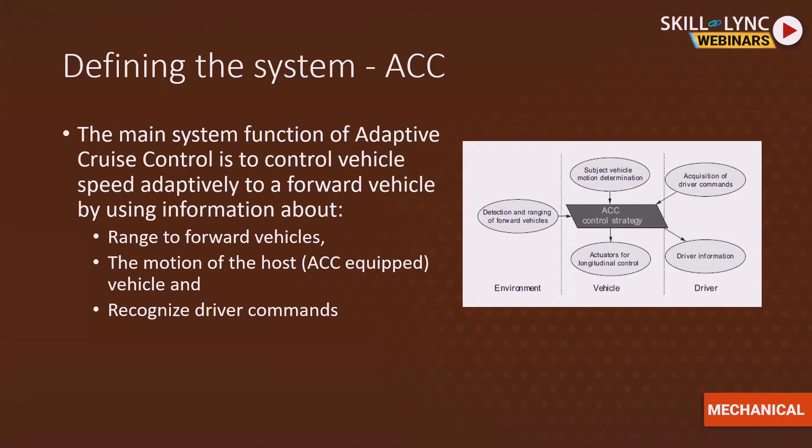So what are the conditions for ACC? Like when you look at an ACC system, what are the conditions of the system? So essentially what we're looking at is individual stability. That is our primary goal when you talk about ACC. How do you quantify individual stability? That's when the spacing error of the ACC vehicle converges to 0, when the target vehicle is moving with a constant velocity. This is essentially an ideal condition. That's how we always start, right? In engineering, you set an ideal condition and you try to achieve it.

Mathematically, how do I represent it? So mathematically, as you can see the equation on the right hand side, delta i is your spacing error. So what you want is x(i-1) plus the change in this should be equal to 0. And when can you say that individual stability has been achieved? That's when your acceleration is 0 and your spacing error is 0. Because if you're not accelerating, then you're maintaining a constant spacing, right?

So that is your primary desire when it comes to designing an ACC controller. If we move up slightly, then you talk about string stability. So string stability of a string of ACC vehicles, we are essentially moving into CACC territory here. But what we were trying to do it only with the radar, right? So essentially what happens is in an equation here, we have xi and xi minus 1. It essentially keeps increasing to xi minus 1. Then you have an xi plus 1, xi plus 2, and so on and so forth.

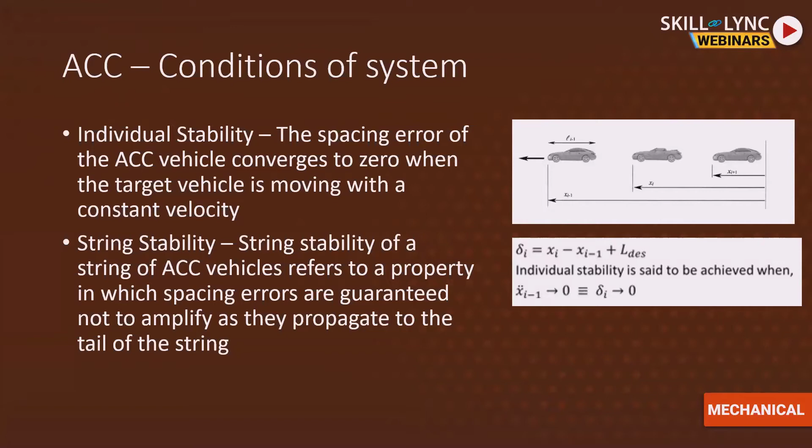Here, it's basically just like a state flow diagram for an ACC control architecture. What is the overall system, right? So here you can see first is the commander, which is the desired headway algorithm. Here, all your inputs are going in, right? Everything that we spoke about earlier. So the range, the R dot, which is basically the rate of change, then the velocity that the driver has set, the desired headway time, which is essentially the distance or the time you set with the lead vehicle, and the velocity of the vehicle that we are in. All of this

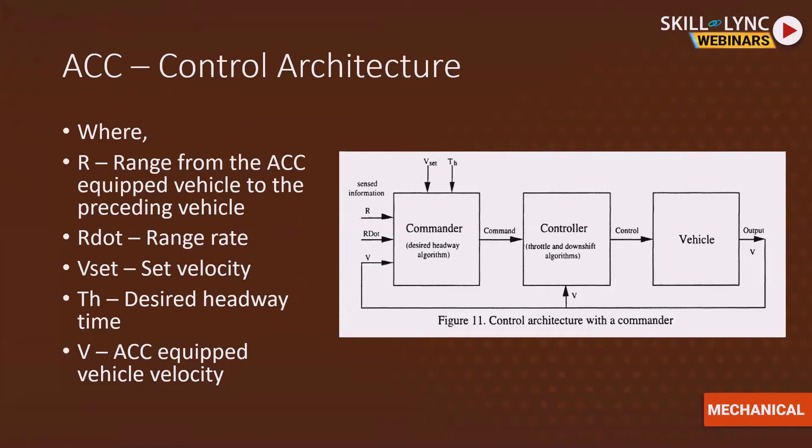essentially translates into something as simple as acceleration commands, which then go to the controller, the ACC controller, which then sends them to the engine or the braking system as required, and essentially that controls the vehicle. As you can see here, what we get is the velocity looping back. That's our feedback in the system, making sure that we are at the correct velocity at all times, and that controls our acceleration.

If I was to model this as an upper and lower controller, basically your upper level controller determines the desired acceleration of the vehicle. Now, your upper level controller could either be the human driver, which determines the velocity and sets everything and then gives it to the ACC controller, or your upper level controller could also be your autonomous system, which is basically looking at the overall environment and telling the lower level controller, which is your ACC controller and your brake controller, what to do. So your upper level controller is a hybrid of either just the ACC system, it could be the driver, or it could be the autonomous controller.

For most applications that you'll see, for non-autonomous applications, the upper controller is just the ACC system. So it's essentially just the radar and the ECU. It's calculating in real time based on the inputs that it's getting and just sending the desired acceleration to the lower controller. And the lower controller is essentially your mechatronic actuators, which is sending a signal out to your mechatronic controllers to either accelerate, brake, or whatever it needs to do at that point of time.

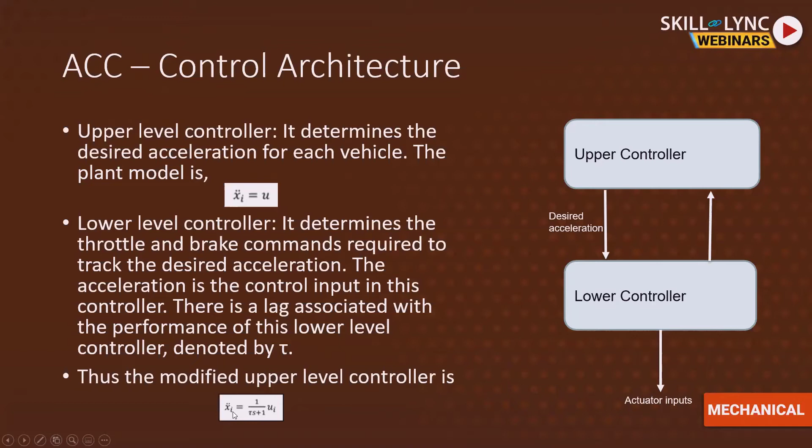So essentially, the plant model, the controller that we have, the system input is your acceleration. So that's what I mean when I say x double dot i is equal to u. Now this is the ideal application like I've discussed earlier. Once you move into the actual application, there is always a lag, right, between the request sent by the upper controller and the implementation, just the mechanical lag and the electronic lag that exists. So you can add a factor called tau, right? So when you do the Laplace transform, essentially what you get is the acceleration is equal to 1 over tau s plus 1 into the ui. That's the input that's being sent.

Now, what are the different control strategies that are used? I'm going to discuss the two most common ones. There is constant distance control. You maintain a constant distance with the vehicle in front. This is regardless of anything, no matter what the velocity is, you always maintain a constant distance. This is not suitable for autonomous applications because the spacing error keeps increasing, especially since you're trying to maintain a distance. Any error in the distance gets multiplied pretty quickly, so it's not desired. Even when Bosch says there's a constant distance being maintained in their video, it's actually a hybrid of distance and time. It's more time based because you would want your vehicle to be closer at lower speeds and a greater distance at highway speeds.

I mean, if you set a distance of say 3 car lengths at 80 kilometers per hour and you're in stop and go traffic, so imagine you come to a red light at the end of this traffic, you don't want to maintain 3 car lengths, right? Somebody's going to move in and cut you off, and then that's basically going to keep pushing you back.

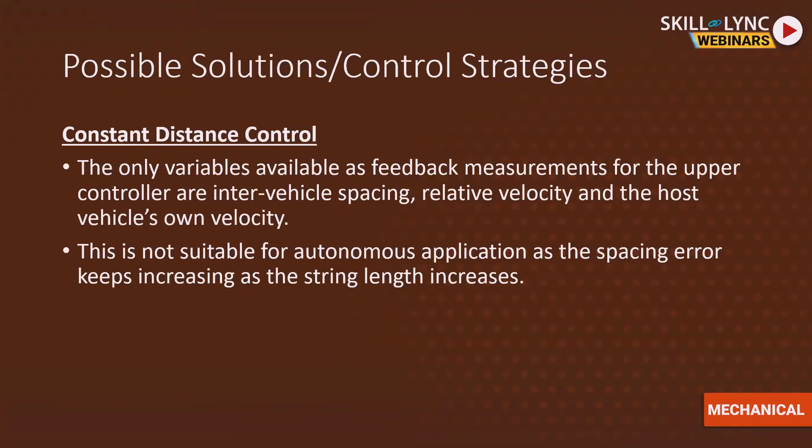So constant distance control was one of the first ways people thought of ACC. It's not really used very often now. It's not the desired way. It's more a hybrid which is used. And the other strategy, which is more commonly used, which is actually preferred, is constant time gap.

So basically, in constant time gap, the desired inter-vehicle spacing varies with velocity. So it's pretty simple to understand, right? Essentially, if you set a 3-second distance on the highway, a 3-second distance at 80 kilometers per hour is a certain value. But when you go down to city speeds, which is maybe 20 or 30 kilometers per hour, it reduces proportionately. So you still maintain a safe distance, right?

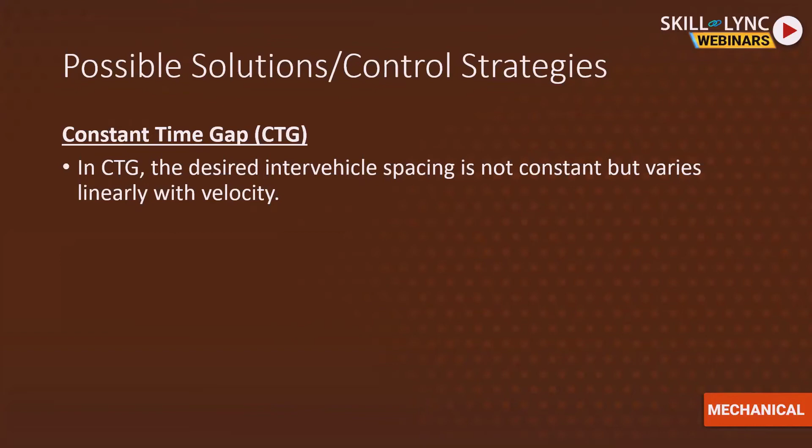But you can be confident that nobody's going to get in between your vehicles, or there's too much space and you're wasting space in a traffic jam. If all the cars are maintaining a 3-vehicle distance in a traffic jam, then your traffic jams would extend for kilometers because there's so much wasted space in between.

So how would we model it? This is something that I modeled on Simulink. This is a pretty rudimentary ACC system that I modeled. It's again based on the same state flow that I showed you a few slides up, which is basically looking at the current speed, the front vehicle speed, and the current distance of the vehicle in front. And we feed all of that information into our adaptive cruise controller.

And as you can see, the only output from our ACC block is the acceleration requirement. Here it's being sent to the vehicle model just to translate, because obviously there are going to be losses and the response time and everything. And that's sent back as velocity all the way into our adaptive cruise controller. Again, this is almost exactly like the state flow I showed you earlier. In fact, it was modeled based on that.

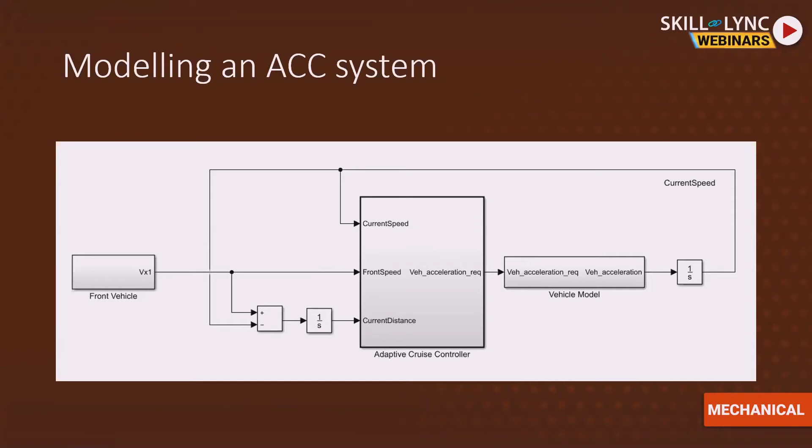The thing we really need to analyze as engineers working on an ACC system is what lies within this ACC block. That's the crux of it. That's what separates Bosch from Continental from all the other manufacturers, and how OEMs implement it. This is what really matters, the contents of this block, how you handle these 3 signals. Knowing you need these three signals is pretty straightforward. We know this is what you need, but what do you do with them?

So this is the guts of that controller. I'm not sure if it's self-explanatory, but basically you get these signals and you analyze them based on what you want. So let's just follow the velocity, right? You're looking at the current speed of the vehicle. Here it goes up. There's a PID controller which is looking at the set speed. It's trying to modulate your speed to make sure that you're close to this ACC set speed, and it's sending it to your vehicle acceleration control.

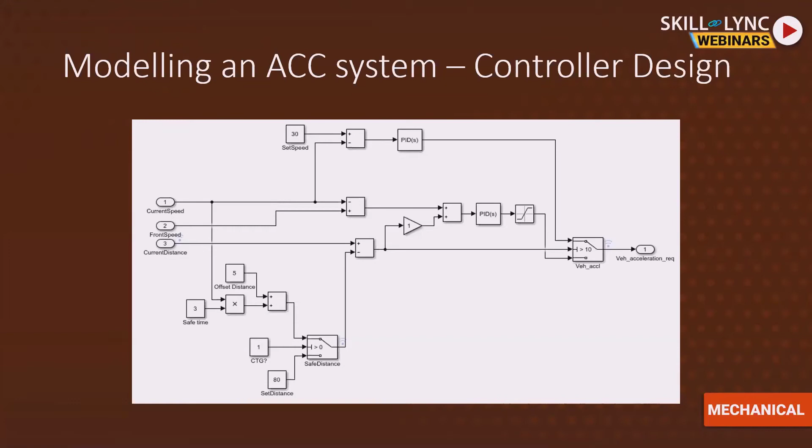It also comes in here with your front speed, and you're measuring the delta and sending it here, which then compares it to the current distance and the safe time that you've set, and sends it to different PID controllers within your algorithm, and essentially gives you a constant requirement of acceleration based on the inputs that you're getting. I have a few graphs where I've modeled the performance of this and seen how it reacts and behaves. So let's look at those. I think that'll help you understand what this does and how you analyze it.

So to analyze the performance of my ACC controller, I sent a target vehicle with a sine wave velocity input. So my lead vehicle is moving with a sine wave velocity, right? If you look at the maroon line here, that's the current speed of the vehicle. The blue line is the front vehicle speed, right? And the yellow line is what is set for a constant distance control.

So as you can see, based on constant time gap, the response is a lot better. There's a lot less fluctuation. That's why constant time gap will probably feel better than constant distance gap in this one, because with constant distance, you're always one step behind, because you're always trying to estimate how much distance you need to maintain. And that always keeps you on the back foot. That's why you notice that there's always excess input when it comes to constant distance, but with constant time, it's a lot smoother.

For current distance, again, if you notice here, the current distance is maintained very well for the constant time gap controller. The constant distance, as you notice, is constantly lagging. So here you see it is following a sinusoidal pattern because of the constant movement of the front vehicle. This error can add up really quickly.

So that's what we discussed earlier, that a constant distance gap is not suitable for ACC, because once more than one vehicle is added, that delta can add up really quickly. So if I was to add more than one vehicle here, as you move on from vehicle 1 to vehicle 2, vehicle 2 to vehicle 3, it would really just keep exponentially increasing the error. And that would cause a lot of chaos in real world applications.

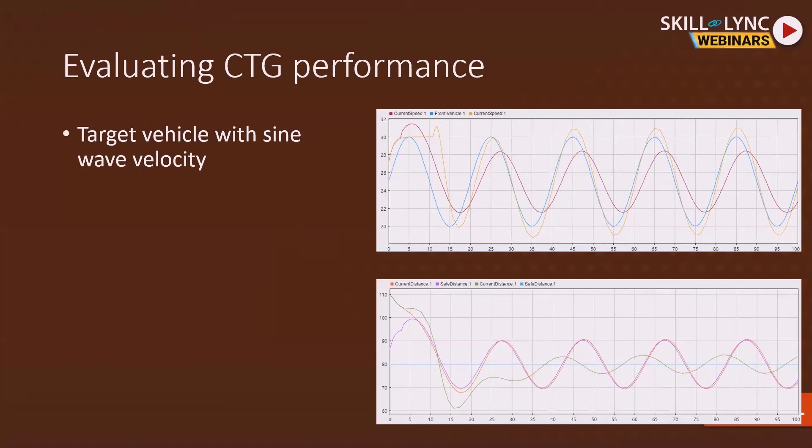Another maneuver we did was stop and go to see how it responds. For stop and go vehicle traffic, here the graphs are actually flipped. The blue is the current speed for the CTG, and purple is current speed for CDG. Again, you notice that the blue, the constant time gap, tracks our lead vehicle a lot better than the constant distance does. If you look at the distance between the two vehicles, you can see that it's maintaining a constant distance at all times.

That's what CDG does. So I guess there's not a lot of difference in this, but it's important to analyze both and see where the advantages are, so that you can decide which one you want to implement. For this project, I looked at the performance across a bunch of different maneuvers. It was not just this, there was emergency stopping. Depending on how flexible your ACC controller is, you can input whatever you want and see how it behaves.

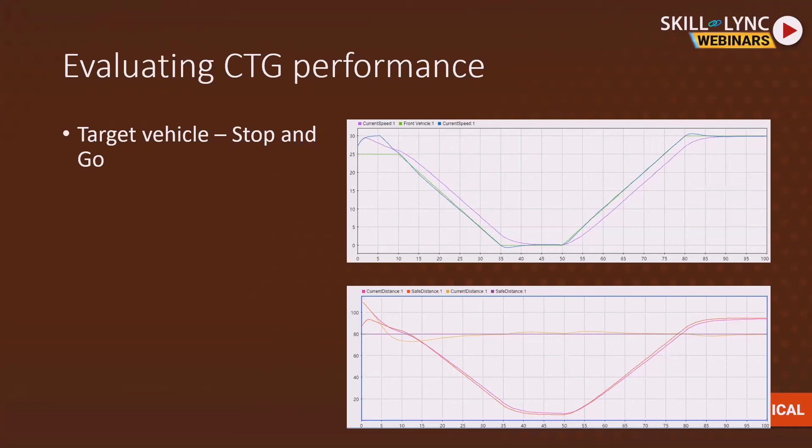That's one of the reasons why Simulink and MATLAB are often used to model all of this. It just makes life a lot easier, and you're able to evaluate a lot of things really quickly once your controller is designed. So that's why all of this was done on MATLAB. So let's move on to CACC and the control architecture that you would use for a constant time gap design when you move to CACC.

So essentially the control input is still the same. It's still your acceleration. The only change is that it now extends. It's not just for U1. It's U1 plus U2, U3, U4. It goes all the way down the chain. This image on the right shows you essentially what's going on. There's a radar, there's wireless communication, there's a bunch of other things going on.

We've already discussed that the distance between the vehicles is proportional to their speeds. In case the speed is doubled, the offset distance is also doubled, which is essentially how you would drive as a human. You always like to maintain a constant time gap. It's even recommended: the recommended driving practice at 100 kilometers per hour is about 3 seconds between you and the vehicle in front to give you enough space to brake. It has massive implications when you get to individual and string stability.

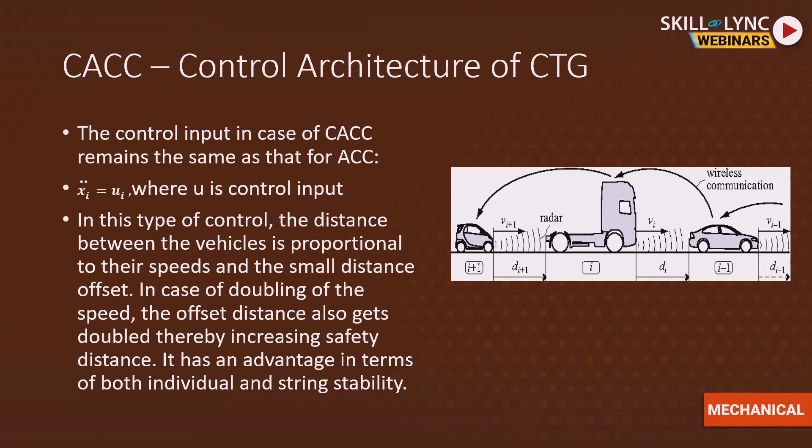Some more equations I'm going to throw your way now. Basically, the headway to be maintained by the vehicle. If you go back to this previous diagram, the headway is basically the distance that you need to maintain between your vehicle and the vehicle in front. This can be represented by this equation. Now, if you use this in the control equation, you will get the equation that I have at the bottom, which is the Ui equation.

Right, it looks very complicated, but there are pretty simple ways to derive it. Once you start doing the mathematical representation from the beginning, I could show you all the equations, but unless we sit down and work through each step, it's going to get really complicated, and it really won't serve the purpose of helping introduce you to CACC, ACC, and the basics.

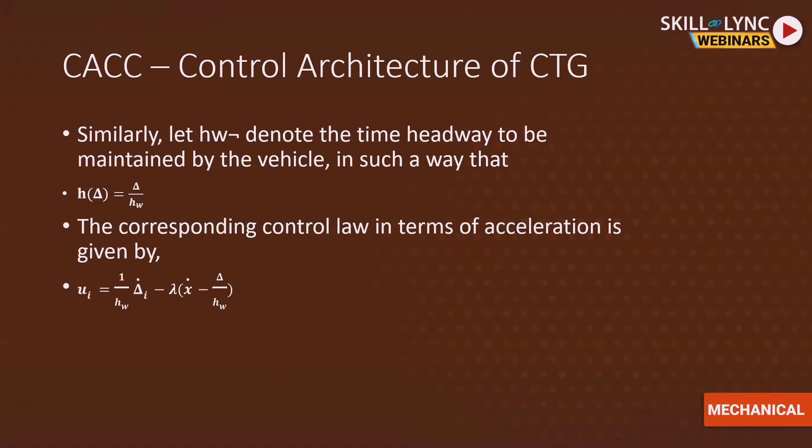So essentially, I've jumped to the last equation just to show you that it does take into account a lot of different factors, and it's not just based on the delta or just the speed of the vehicle. It actually does get quite intricate, and that's why CACC is a challenging engineering problem. So where are we today with ACC and CACC?

It's quite interesting. There are a lot of research papers out there. They're all in pretty simple language if you were to look for them online. Finding and analyzing them is the challenge as engineers. So that's what this is about, to give you a good idea of what it is and a good step to build on once you read those papers, so you can actually analyze them from an engineering point of view.

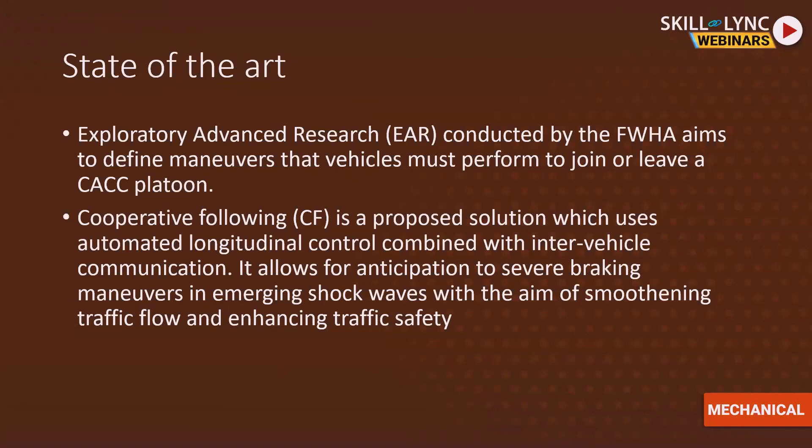Then you've got cooperative following, which is basically CACC, but slightly more. It's not just a simple CACC, but you're smoothing the flow. You're accommodating a giant string of traffic, and it basically controls your traffic based on those inputs. And now, why would you want to learn about CACC? I'm sure some of you are looking for jobs, maybe in the future, maybe not today, but why would you want to be interested?

ACC and its various forms are used across the entire automotive industry. It's not just the passenger car business, it's not just commercial, it's used across. There are a few companies who have the best equipment: Bosch, Delphi, Continental, when it comes to radars, cameras, and even complete ACC modules. But some OEMs, especially the new autonomous OEMs, prefer to do it their own way. In the commercial vehicle business it's the same. A lot of manufacturers buy equipment from Bosch, Delphi, Continental, install it in their vehicles, and design their own controllers.

Because today the radar is smart enough to give you all the inputs you need. Your front vehicle speed, front vehicle distance, decel, all of that is calculated in real time by the radar and sent to your own ACC controller, and you can decide how you want it to react. But to get to the point where you can design it, you need very good system knowledge. You need to understand what goes into a lower level controller and vehicle dynamics design. You can't accelerate and brake without understanding how the vehicle is designed.

Because you are aiming for comfort. Deceleration limits, brake application, the way it's applied, to understand all of that in a fundamental way where you can design an ACC controller that can be used by an OEM, you need very good system knowledge. And to implement all of that knowledge, you need a strong background in controls, and be able to understand how you convert those equations into an actual implemented system.